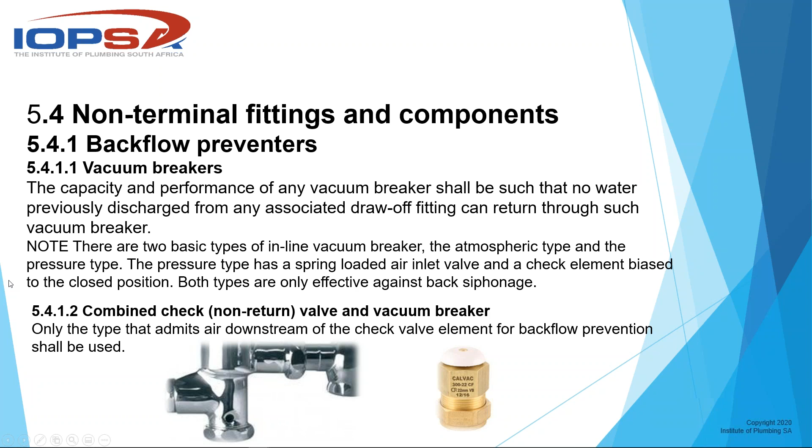Now, I think every single one of us has a washing machine at home. And did we know that there should be backflow prevention on that? Now, in a discussion earlier this week we had about the webinars and so forth, Herman Weber came up with some interesting information, and I'm just dropping it onto you quickly. It's the South African Domestic Appliance Association.

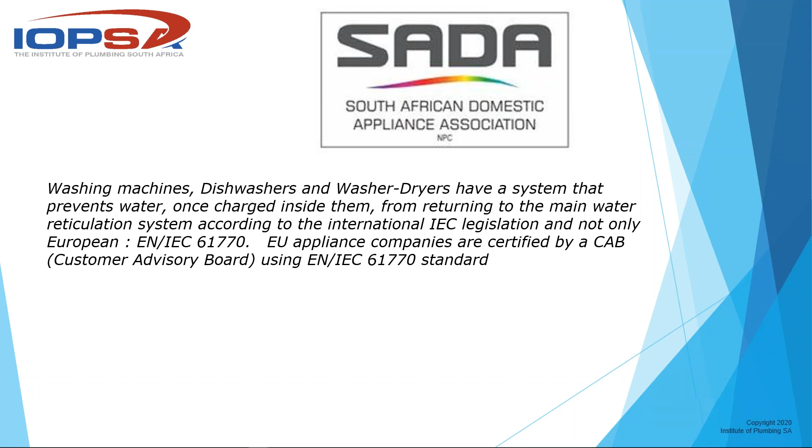So most of the washing machines and so forth that we do get here in South Africa have got this backflow prevention already built in. But according to SANS 10252, that isn't sufficient. We don't know what laundry equipment is going to be attached to that washing machine point. So we still have to have sufficient backflow prevention, whether it be a vacuum breaker on that line or a check valve, to make sure that there is no backflow from our laundry at home.

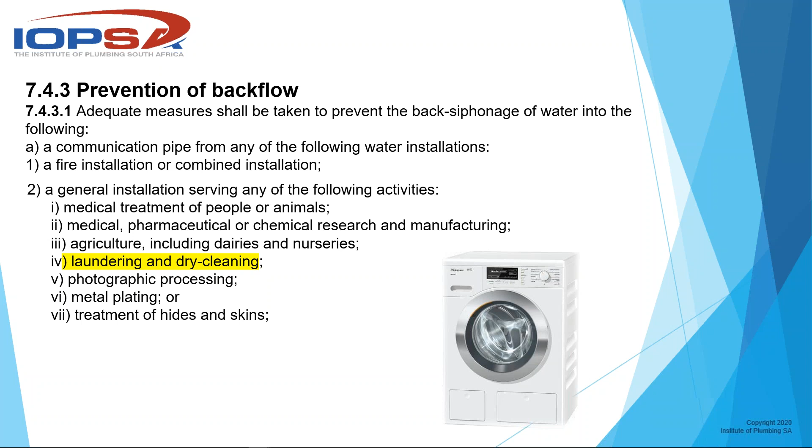Now, some of the municipalities, and I always thought Cape Town was way out putting that in their municipal bylaws, that all outside garden taps have to have a vacuum breaker attached to it. And I thought they were really going overboard. But if we look, it's in our national regulation here. If there is a hose bibcock, there has to be backflow prevention in the form most probably of a vacuum breaker on that line.

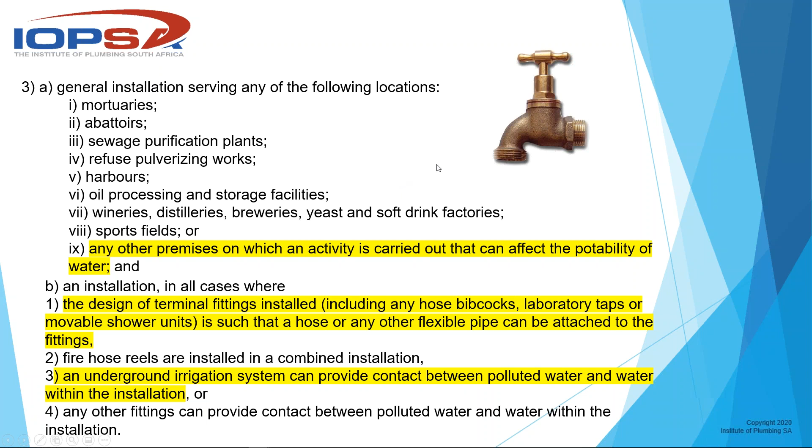Then it also carries on, and it shows here an underground irrigation system can provide contact between polluted water and within the installation. So most of us have got a hose bib tap or an irrigation system. Now, not all of us have these fancy pop-up systems. It could just be one that plugs into the ground, but if it is one of these pop-ups where it drops below the ground, that unit there can be filled full of water that could be contaminated with pesticides, with all sorts of agricultural products and so forth, and it can be sucked back into the main system. So any of those type of installations on our property, we've got to have these backflow units installed.

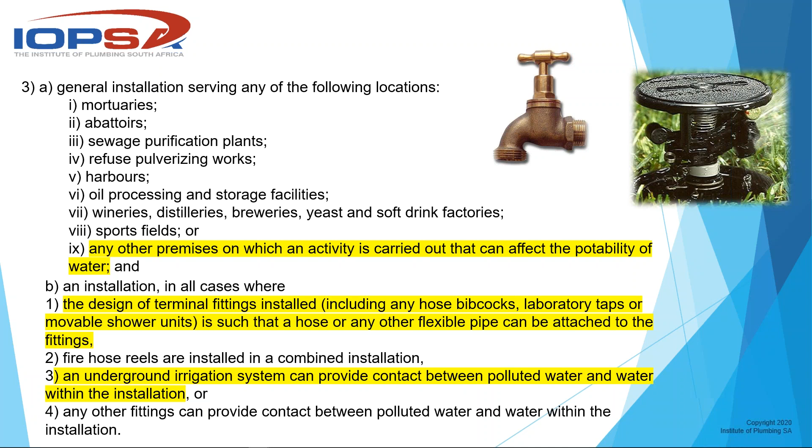So, are we getting scared yet? I got scared when I went through this.

We have these little nicky spouts, or the combination bath filler spout that is very popular these days, where there is no spout coming from the wall. Your overflow and your bath filler all sits in one. The problem with that is, looking very nice, but it's below the flood level of the bath, or the overflow rim of the bath.

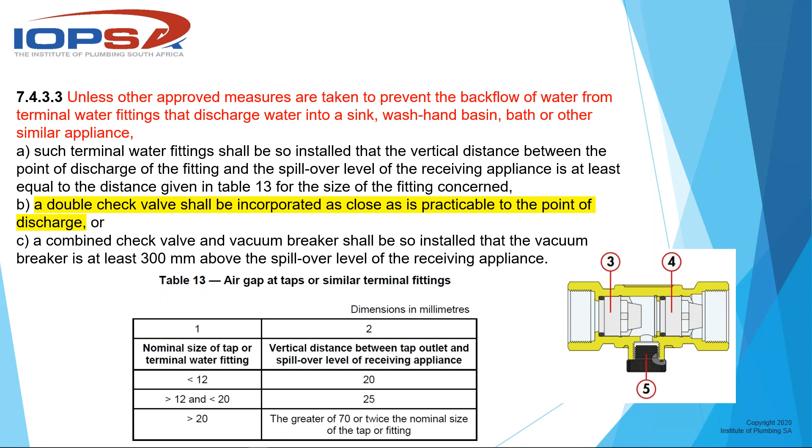And if we have a look further in the law, it tells us that that point must actually be serviceable. We must be able to go in and have a look at it and see that it's still working, clean it out, that type of thing. So that is something that we've got to keep in mind. With most of the houses that we're doing installations at, we are using these units these days.

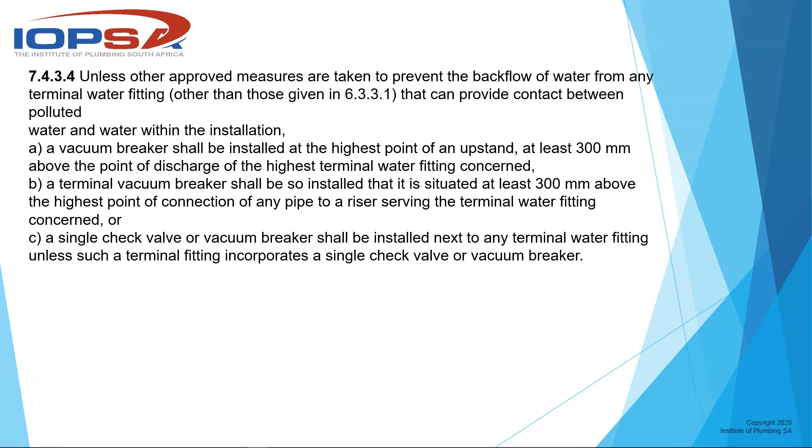So if we then carry on to the next point, which is 7.4.3.4, it refers us back to specifications given in 6.3.3.1. And I'll just pop up 6.3.3.1, and I see the internet seems to be a little bit slow, but it's popping up there on your screens now. Give it a couple of seconds. Yes, there it is up now.

So even on your cistern in the house, most of those filler valves have got a little back siphon protection hole in there. But the problem is most of them are lower or in line with the overflow level of this appliance. So it would not be sufficient. You would have to put another vacuum breaker on the line at least 150 millimeters above the overflow level. So that's something I've never seen anybody do. And yet it's there in SANS 10252.

So we see then in 7.4.3.4, it says, unless we have done this, a vacuum breaker shall be installed at the highest point of an upstand at least 300 millimeters above the point of discharge of the highest terminal water fitting concerned. So what it's saying here is, if we've got a whole line of cisterns maybe on one line, at the highest point, 300 millimeters above that flood level, there must be a vacuum breaker. So unless you've complied with 6.3.3.1, which is a vacuum breaker at each toilet, you would now be able to put on one vacuum breaker at the highest point, 300 millimeters above.

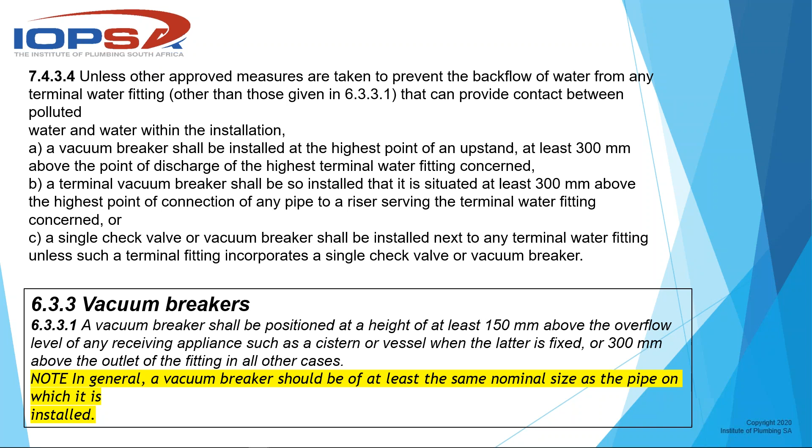Now that part there, we often forget about also, especially when it comes to geyser installations that have got solar panels and so forth attached to it. Quite often people are putting an anti-siphon loop by the geyser, but yet that is not the highest point of that installation. You actually need to take that vacuum breaker and anti-siphon loop higher than the solar panel. Otherwise, it's not an anti-siphon loop.

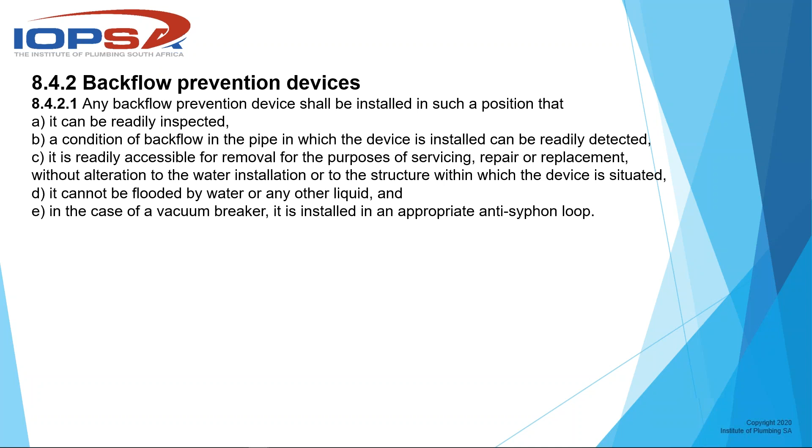So these are all questions that we've got to put to ourselves. How accurately are we sticking to the basic installation requirements of backflow preventions and vacuum breakers? I know it was a bit of an eye-opener for me, and I'm sure to many of you guys, you may never have seen these points before either. Some of you may be complying to it, I'm not sure. But I haven't seen many installations which comply to all these things. So I think we've all got a little bit of work to go and do to the installations and designs that we are doing.